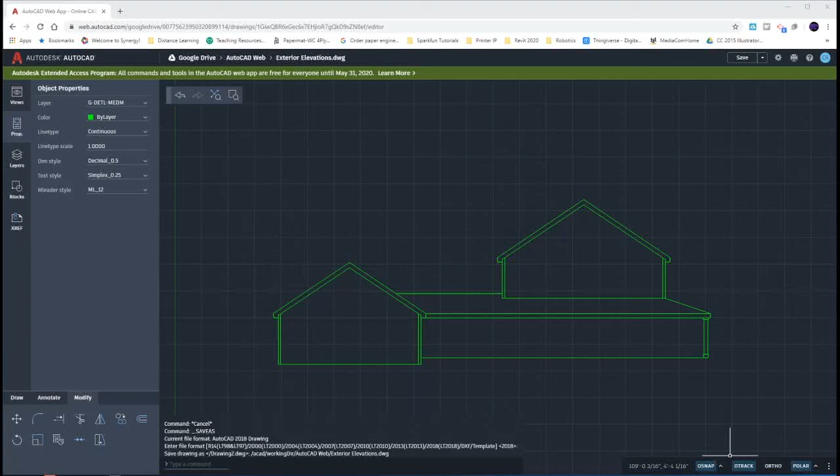To XRef a drawing or attach an external reference, all you got to do is click on this little XRef button. What it does is attach a drawing to our current drawing temporarily. It's similar to a block, but you can attach or detach it, and it doesn't store itself into the drawing.

A nice thing about an external reference is that if you ever update a drawing, like our floor 1 we're going to be attaching, it'll automatically update in our new drawing. A block, you would have to go back and redefine it.

Hopefully your first floor plan looks similar to this. I want you to place it just above your elevation.

Now, this is not currently mapped to where it is, but what we're looking at is our garage down here. We're looking at our second story. If you remember, we only have the second story in this portion of our building, and then that little mudroom, bathroom, and stairs that we have.

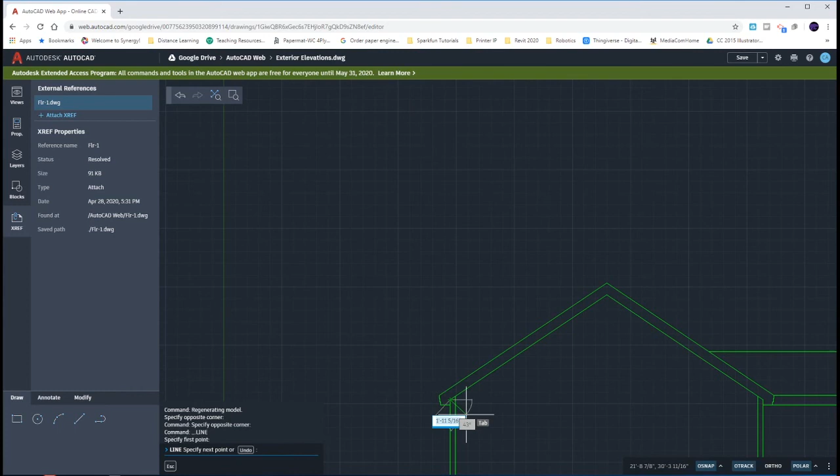For me to make this drawing mapped exactly to this one, I want to draw myself a nice little temporary line. I'm going to draw it from the left edge of our garage, not the gutter edge, but the left edge of the wall. I just want to draw this line here straight up, doesn't matter how far, just straight up. This vertical projection is the left edge of our garage.

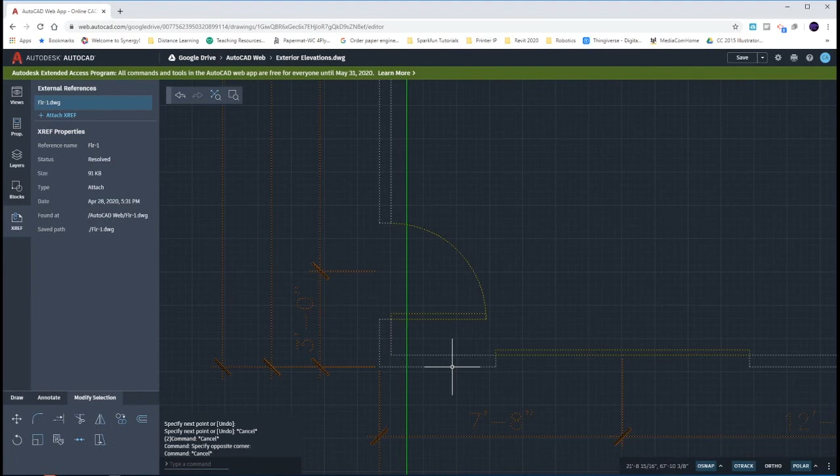I want to align the left edge, or this outer exterior wall, with this garage line. So simply, I'll take my external reference and move it from that endpoint to where I just touch any portion of that line. Now this is where some students make a little mistake, and they think that this second line on the inside here has something to do with our wall thickness, and it doesn't.

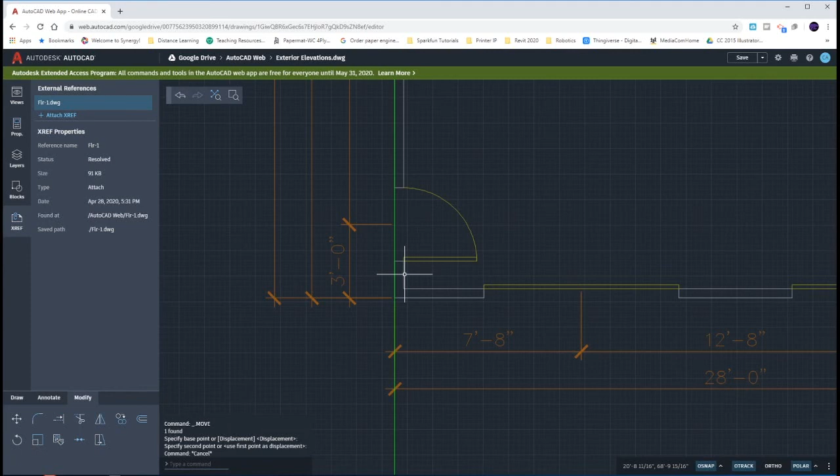Our garage walls are 4.5 inches thick. That's with the stud layer, the sheathing, and the interior gypsum board. That has nothing to do with the outside trim board that we have on our garage. So please be careful. Do not think that these lines here represent anything on the outside other than the external pieces of our structure.

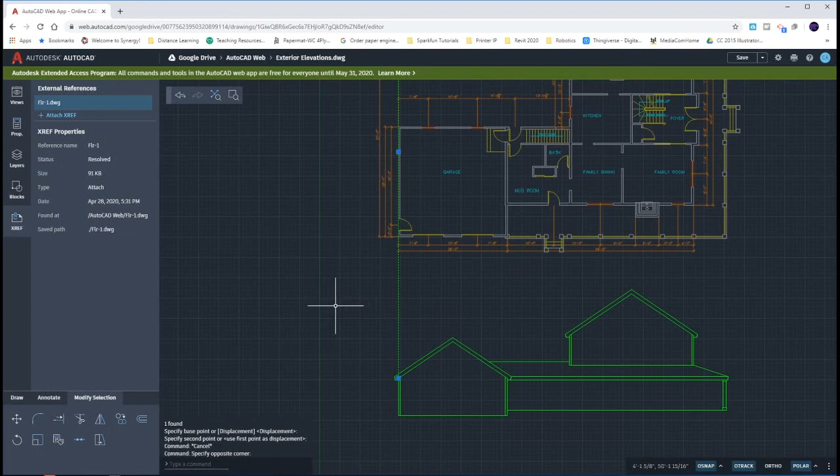Once I have them lined up, I can delete that temporary line. And if I drew more temporary lines, I'd find that the outside edge of my garage touches the outside edge of this, the outside edge of my second story touches here, and same thing with this outside edge of my second story to this side.

What's super cool though is that this column here is this column here, just in a different view. So if I want to get this column copied over to the left at the exact same spacings as these columns here, I can use this drawing to make that copy a lot easier.

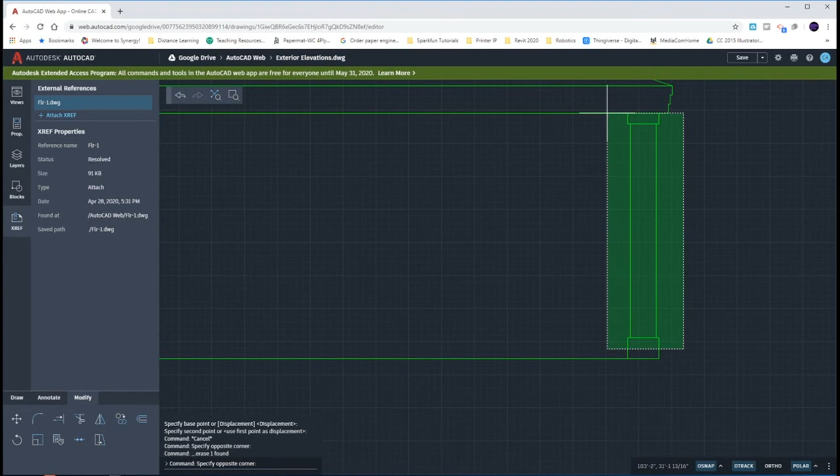I'm going to go ahead and grab just my column, and I'm not even going to look at this drawing anymore. I'll keep it in my view so you see what's happening, but I'm going to focus my attention up here.

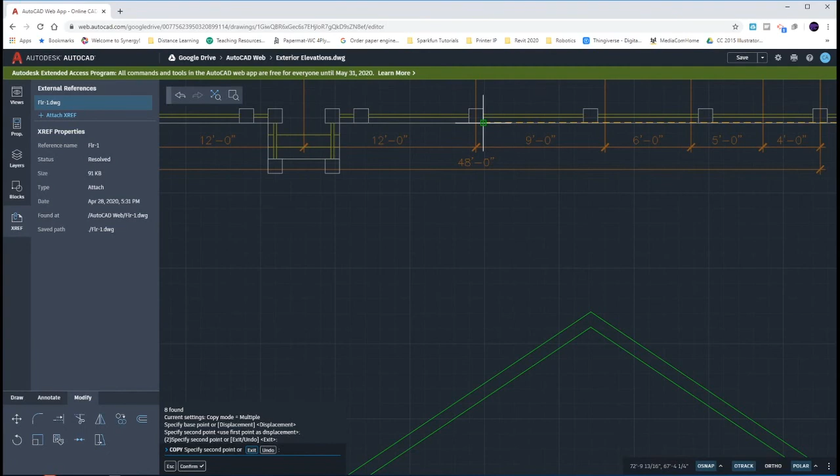When I copy, I'm going to be copying this column from this reference. I'm going to use my bottom left endpoint of that column, and when I copy it over, I'm just going to go to the bottom left endpoint of my column on my floor plan. Each time that I click on that bottom left corner, what I'm doing is copying over the exact distance that these columns here are located in our actual floor plan.

I'm going to skip these two because they're a little bit shorter, and I'm also going to skip this one here. If I placed it, it would go over our trim board, and when you have too many lines on a detail, things kind of get jumbled. So it's okay to omit certain details as long as you see them in other plans.

Our two that belong to the stairs here are a little bit shorter. In your document, if you go down to page 16, the very top view, you'll see that they are 3 feet 10 inches tall. We know where they're placed left and right, but they're a little bit shorter than these nice tall columns.

I'm just going to use a real cool tool called the stretch command to get them a little bit shorter. What I want to do is take these columns, one of them, and if I remember the math of where they were spaced, they were at a 2-foot distance.

I could copy them from my external reference, or I could just copy them down in this drawing 2 feet over. I could do the same thing for this one here and copy that one toward the inside by 2 feet.

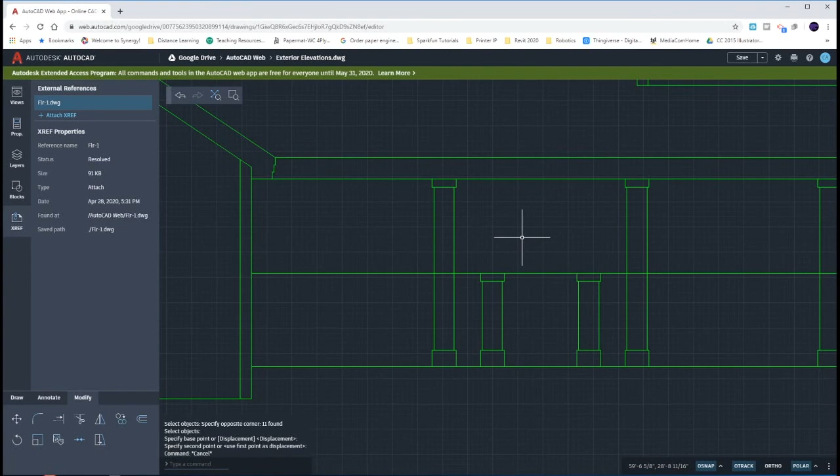And now we've got our lower columns. Go ahead and either trim or delete this line and just put your column caps right back on with the line.

Now we have lower columns for when you're walking up the stairs, ones that are going to be down here. And those are 2 feet lower than where these ones here started. I'm simply going to take both of these and copy them down 2 feet.

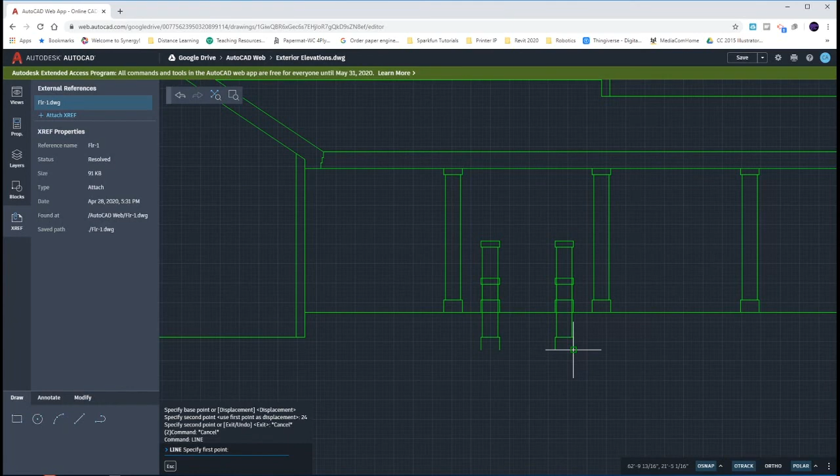Now I need to draw in my bottom line or my ground line. I'm just going to connect both of those because it's actually the bottom of a step. When you're looking at your columns, you're going to see the ones that are lower before you see the upper ones. And so we have some trimming that we need to do. I would be able to look through and see this entire column, this whole column here, and then my cap before I saw my upper column.

So I want to trim out those lines inside of this lower column. If you see the difference between my left one and my right one, this is what we're looking for, and this is what we started with. In order to do that, we're going to be trimming this horizontal line here, here, and then inside this cap, the 2 little vertical lines, and we'll be able to get our column.

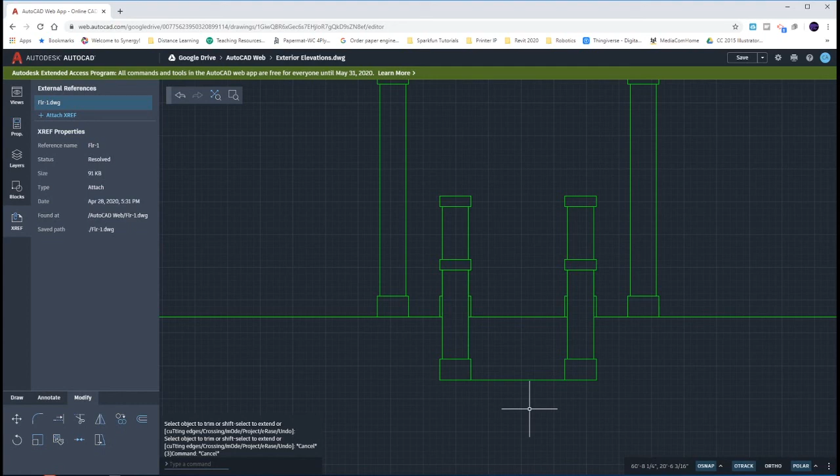All right, now we have some steps coming up. Those steps, there are 3 of them, or you would have to step up 3 times to get to here. And so I'm going to need 2 more lines within this spacing. If you remember the spacing from our lower edge to where we just started, that is a distance of 2 feet. Well, if I need 3 steps within 2 feet distance, I'm going to go 2 feet equals 24 inches. 24 divided by 3 is 8.

I'm just going to take this line here and offset it down by 8. And then offset this next one down by 8. And then I get equal steps coming up.

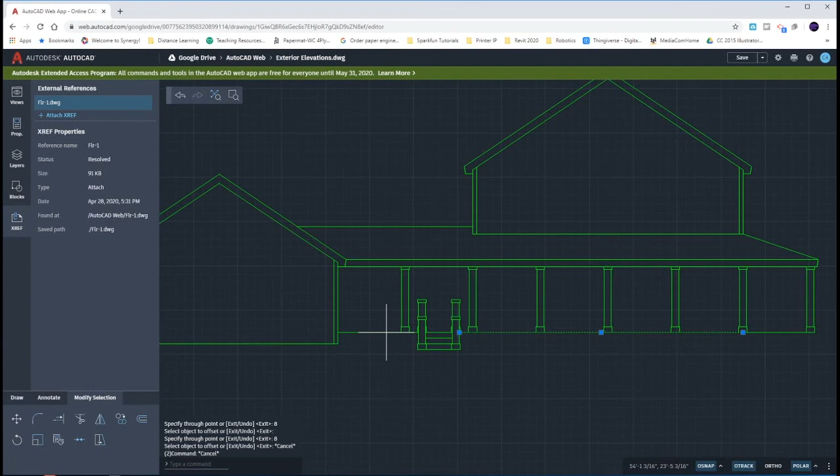On the bottom of our porch, or the base of our porch, still looking at the first drawing on page 16, we're going to see that our porch is 1 foot in height. So I need to take this line, and that line, and I need to copy them down by 1 foot.

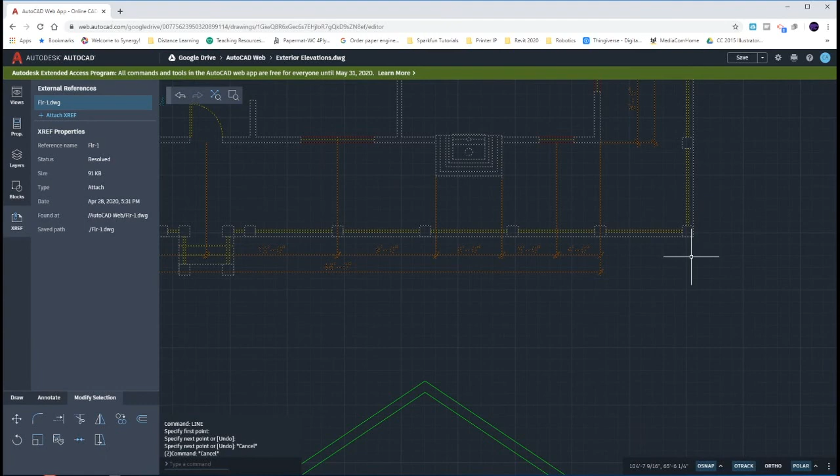In the book, it looks a little weird over here. It doesn't tell us a distance that it sticks out beyond. Don't have it stick out beyond. Just draw our line straight up. The reason that we're doing that is again because of this external reference. The edge of our porch stops at the edge of this column. That's what we drew, so that's what we want to represent down here.

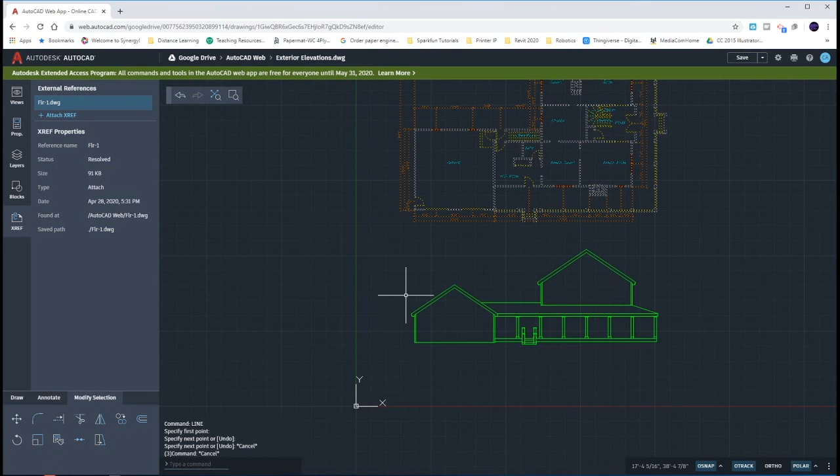That concludes our south elevation. We can detach this external reference, but I'm going to keep it on for the next drawing. We're going to be using our external references to refer back to our floor plans to make sure that we're drawing our actual home.